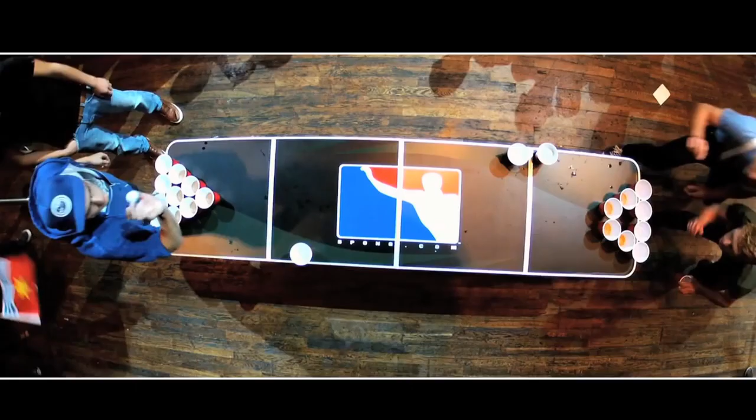Pong, a tabletop game as old as time itself, which has even been commercialized for use in arcade bars by companies like Dave & Buster's. But today, the Pong industry is dying as college students put down their cups and move on to more exciting bar games. That's where the Power Pong robot comes in. We're here to make Pong fun again.

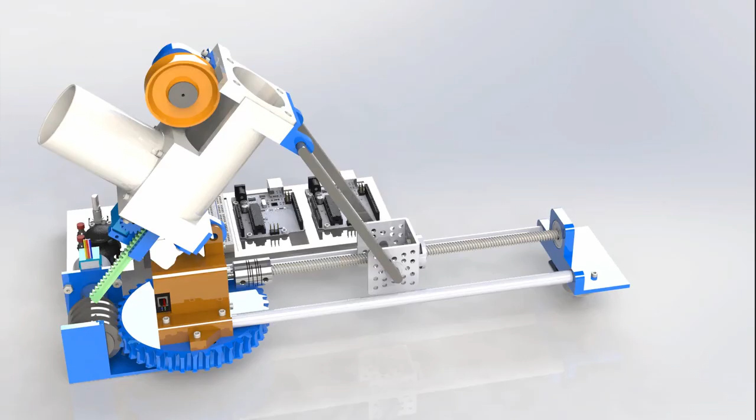This robot consists of several mechanical subassemblies, including the main shooter, where the ball is inserted into the chute and then pushed forward by a linear actuator until it reaches the rotating flywheels. The second mechanical system is the tilt and rotation assembly, which allows the player full control over the assembly orientation and ball trajectory.

The main shooting assembly consists of several mechanisms and actuators, including the upper chute, the flywheel and coupler, the linear actuator and microservo, a spring-loaded latch to hold the balls in place, and a 9-volt DC motor, which actuates the flywheel.

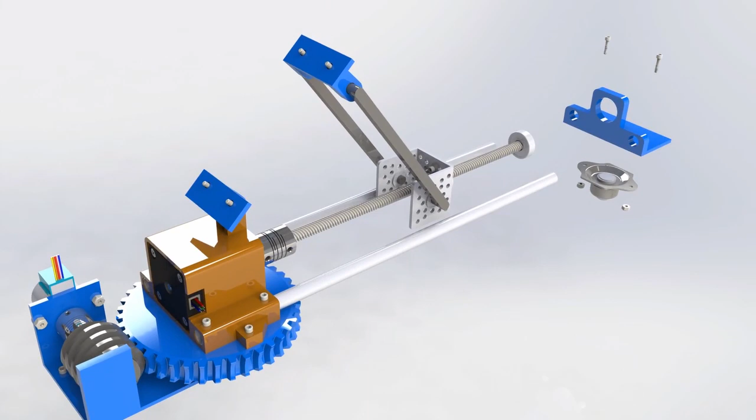The tilt and rotation subassemblies allow the entire system to move relative to the player. They include a ball transfer bearing, a 4-bar linkage system, a low-profile 28BYJ stepper and self-locking worm gear set to precisely control rotation, and a high-torque NEMA 17 motor, which drives a lead-screw linear motion system to control tilt.

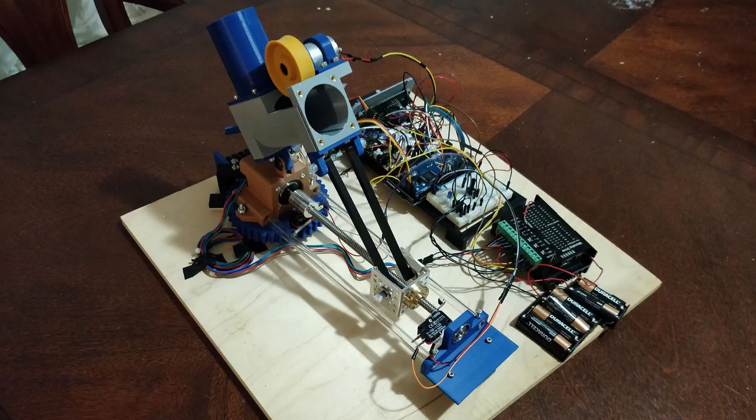The user interface includes a joystick potentiometer to adjust tilt and rotation, 3 normally open buttons to drive the flywheel and adjust power, and a 16x2 LCD display for user feedback. Now, we'll show off the hardware prototype and walk through full end-to-end operation of the Power Pong robot. So I'll display those functions now.

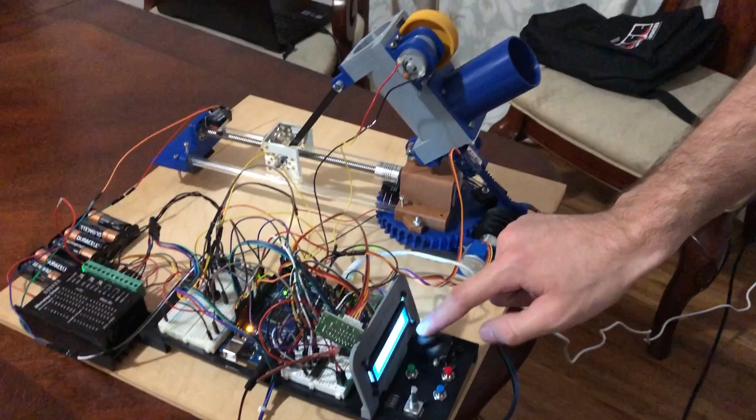You can tilt the controller and it will tilt the assembly. If you move the joystick left or right, the entire assembly will rotate. It rotates in very small increments because you need a very high resolution to hit the cups at the other end of the table. And then you can turn the motor on and off, which turns this flywheel motor on at the top here. These 2 buttons can be pressed to slow the motor down or speed the motor up, and the power level is also displayed on the LCD screen.

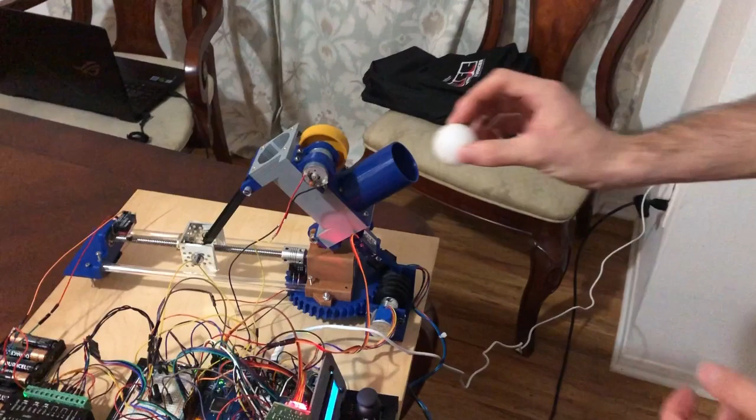So for now, I'll run the motor at maybe like 95% speed, and then I take my ping pong ball, you put them in the tube, and you push once and then the first ping pong ball is loaded. When you want to shoot, you press down on the joystick, and the actuator pushes the ping pong ball into the flywheel and towards the cups. There you go, and we made a cup.

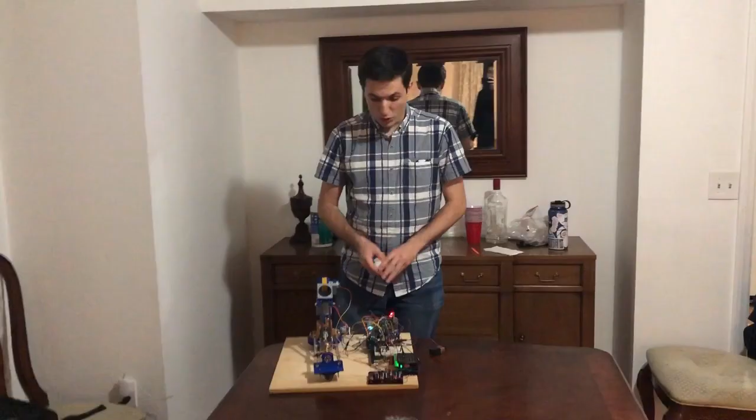So the user will put 2 balls into the chute, and then once they are happy with their angle, they will choose a finger and push 1 ball into the next chamber. And then when they're ready, they will push the trigger. There we go, 1 cup made.